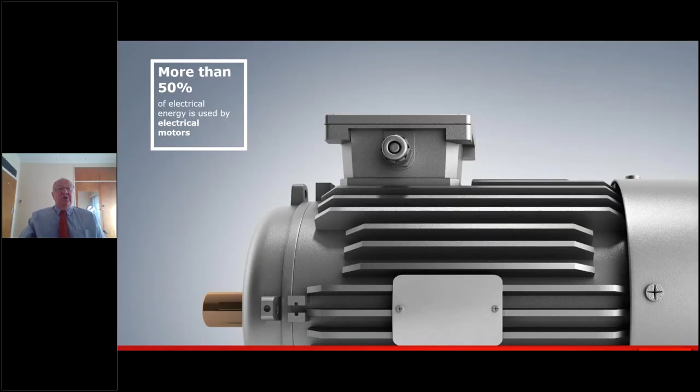So 20% of the world's energy consumption is electrical energy, and very interestingly, more than 50% of electrical energy is actually used by electrical motors. That's quite a staggering fact. 75% of AC drives are used on pumps, fans, and compressors, all basically used in the mining industry. By the year 2040, if we could control motor speed using variable speed drives, there's potential to reduce global energy consumption by 8%.

If we look at fixed versus variable speed control, the most common flow method is by means of a fixed speed motor, where the flow is adjusted by a mechanical device. Using this technique not only wastes a tremendous amount of energy, it also wears out the equipment. With electrical variable speed drives, changing the flow is quite simply achieved by just adjusting the speed or torque of the motor.

As somebody once said, it can actually be compared to taking your foot off the accelerator pedal of a car. If your accelerator pedal is pushed full down, the vehicle's moving fast at high speed. If you lift your foot, the speed of the vehicle will start to slow down. You'll still reach your destination, just a little later, but you'll reduce fuel consumption, so you'll be saving money. It's basically the same with a variable speed drive, and I'll go through the graph now.

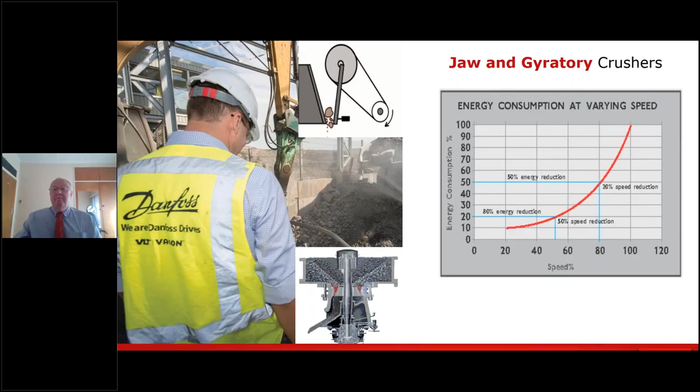Now, quite often when I'm in discussions regarding variable speed drives, I often get the comment, a drive is a drive. In other words, they're saying, well, all drives are the same. Well, that's actually not true, because the high efficiency and the resulting low power loss actually minimizes the heat load on the switch room's air conditioning and its ongoing operating costs.

So simply comparing stated efficiency ratings of variable speed drives from different manufacturers can actually be misleading, because they will all typically be stated to be in the 96 to 98% range. But the factors included in those ratings can be different from one manufacturer to another.

So, for example, the Danfoss drive incorporates a built-in DC link choke harmonic filter and RFI filter. It can be installed with at least 150 meters of screened motor cable between the drive and the actual motor as a standard. And any losses in the drive associated with these filters are actually included in our stated efficiency rating of 98%.

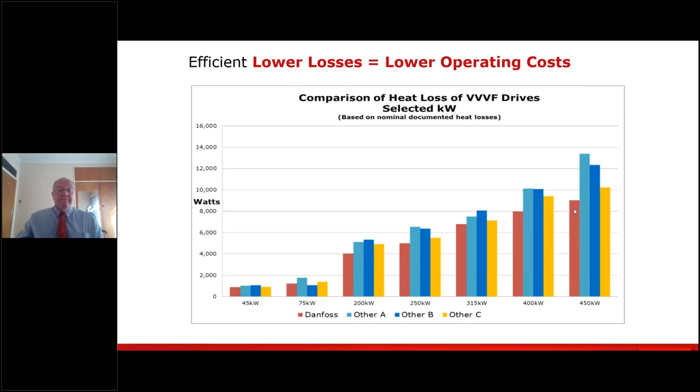Now, what we have here is a project that we did in Australia. It was a thermal coal mine, and the end user and the project company actually reviewed all the drive manufacturers involved that were tendering on this project.

What this means, and we'll come to this on a later graph, is that you can actually reduce the size of the air conditioning, and if you're reducing the size of the air conditioning, you're reducing the running costs of the air conditioner as well. So again, we're looking at cost savings. When the end user and the project house looked at this, they found that by using Danfoss, on average, it was a total saving of 5% of the total VSD cost.

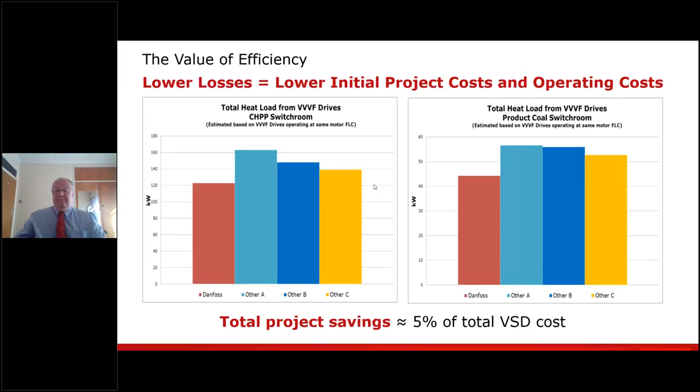We wanted to take that one step further, because we said we can offer an even better solution whereby you can reduce the heat going into the actual switch room even further. All Danfoss drives, 90 kilowatts and upwards, incorporate what we call a back channel cooling design. This has separate cooling paths for the power components and the control electronics, with an IP54 seal between these two paths. This back channel cooling removes approximately 85 to 90% of the power lost directly through the heatsink, leaving only 10 to 15% of the total loss to be dissipated into the switch room.

Consideration has to be given to the outside air quality, but if it is suitable, using the heatsink cooling fans and appropriate mounting and ducting, filtered external air at temperatures up to 50 degrees centigrade can be used to exhaust approximately 85 to 90% of the heat loss from these VSDs directly back outside the switch room, without affecting the switch room pressurization. The switch room air conditioning system then only needs to be sized for the remaining 10 to 15% losses going into the switch room. Utilizing this feature can dramatically reduce the air conditioning requirements of the switch rooms, providing significant project cost savings along with operational ongoing cost savings compared to VSDs that don't have such a design feature.

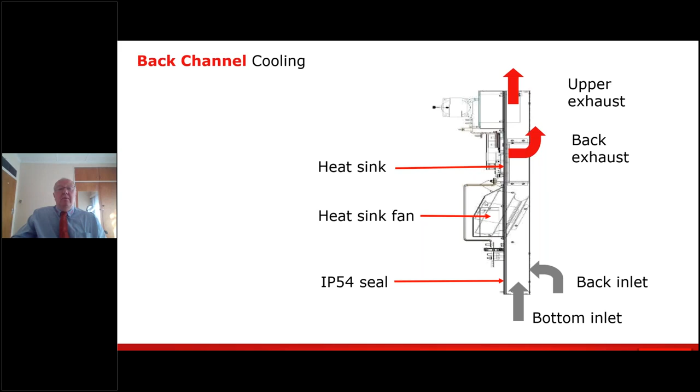When we showed this and used back channel cooling as a value proposition, you can see how the heat going into the switch room has reduced substantially. When this was all put together, it was found that the total air conditioning savings - that's the air conditioners themselves - would give them a cost saving of between $140,000 to $165,000 for all the switch rooms. The reason it's 140 to 165 is because at the time we weren't sure which air conditioning units they were going to use, because they didn't know themselves.

Depending on which units they were going to use, that meant they had an operating cost saving of between $65,000 to $90,000 per annum. So quite a substantial saving, and this actually helped us - we won this project by giving them this value proposition.

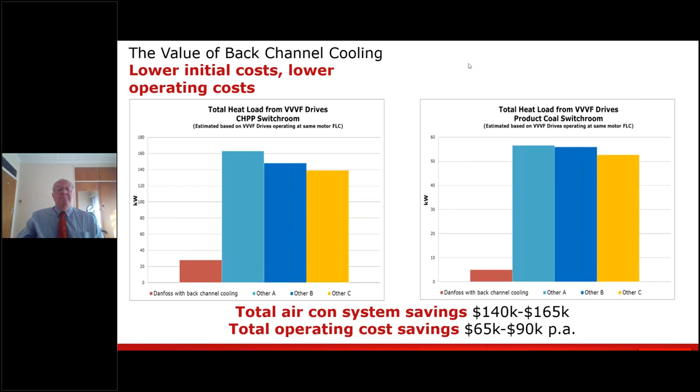If we take a look at what we call the footprint, the size of the drive - electrical equipment on mines is usually installed in areas known as switch rooms, control rooms. Some call them substations, others call them e-houses. These switch rooms are quite often built or constructed from normal shipping containers, 20-foot or 40-foot shipping containers. These are often used when mines are in hard to reach remote areas, because it's easy to load them onto the back of a truck, load them onto a ship if necessary, sail them up the coast, offload them, put them on the back of a truck, and take them to site.

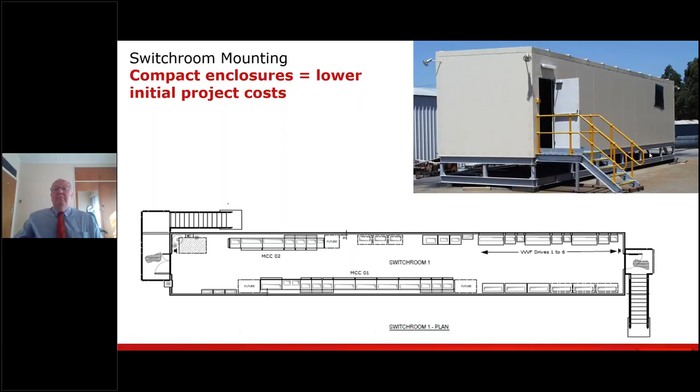So again, we're looking at the same project, and this is again what we used as a value proposition. We looked at the size of all the manufacturers that were invited to tender, and you can see there's a distinct advantage with some manufacturers over others because the size of the drives are less.

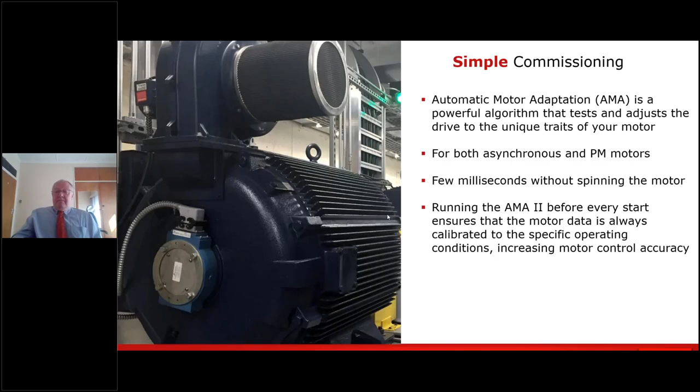Certain AC drives are designed for exactly the needs of mining and minerals processing plants. They have to cope with very extreme conditions, as we said earlier - heavy loading, controlling equipment that's usually quite a long distance away.

It doesn't matter how well the plant has been designed, there's always a way to reduce these costs further, and AC drives are very often used for just that purpose. What does it do? It extends equipment lifetime, optimizes the processes, reduces maintenance, and saves energy costs.

The mining and minerals industry presents some of the most challenging environments for production that I know, and the mine sites and mineral processing facilities and associated stockyards and port facilities are very often of a large scale and in remote locations.

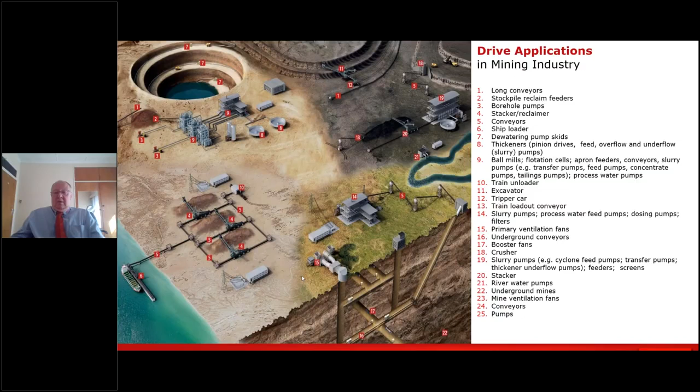In 2015, Danfoss acquired another drive manufacturer based in Finland called Vacon. What that means is that when we combine the Danfoss product range and the Vacon product range - in other words, combine the product portfolio - we can address all low voltage variable speed drive application needs in the mining and minerals industry.